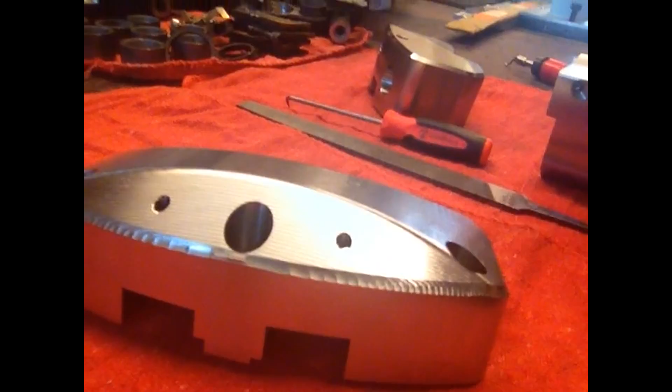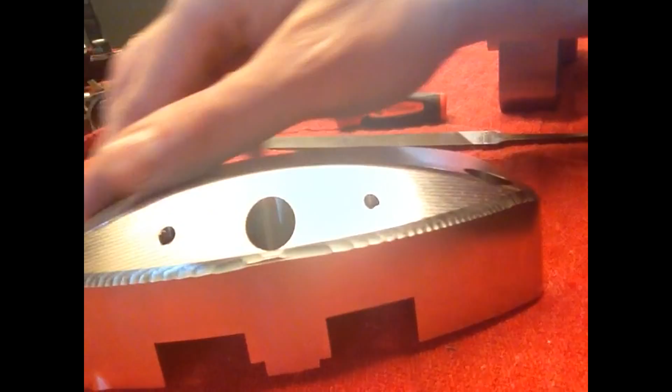And I'm here today. I'm still working on the stainless steel disc brake calipers. So I'm doing some more 3D contouring. This is the back caliper. So let's see if you can see the lines here. I did a parallel pass on this one again, and it's pretty rough, which I thought it would be, along the chamfer that I had on the back side.

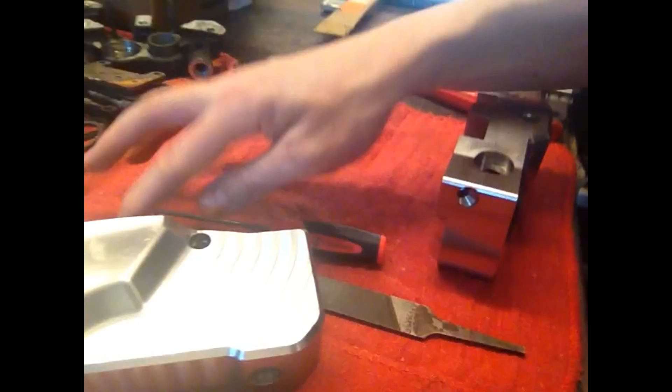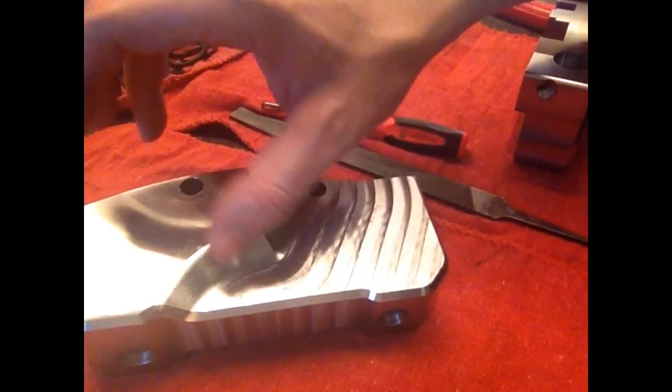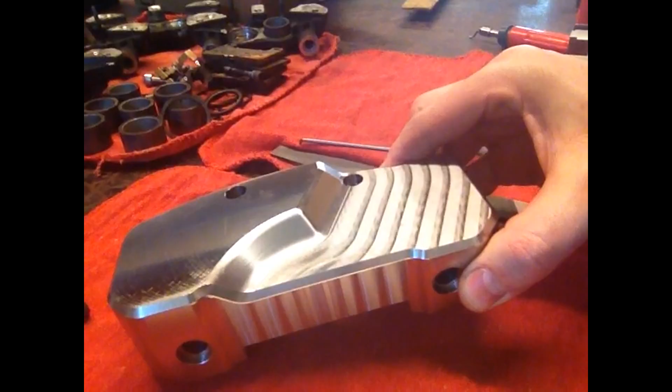So let's see if I can get the front one in here. This is the front half. When I did this, I did a contour, and I only machined basically the angled surfaces with the 3D toolpath. And it turned out pretty nice using contour. I did a 10 thou step over, pretty smooth. I don't know if that's going to show up. I need to get some better lighting.

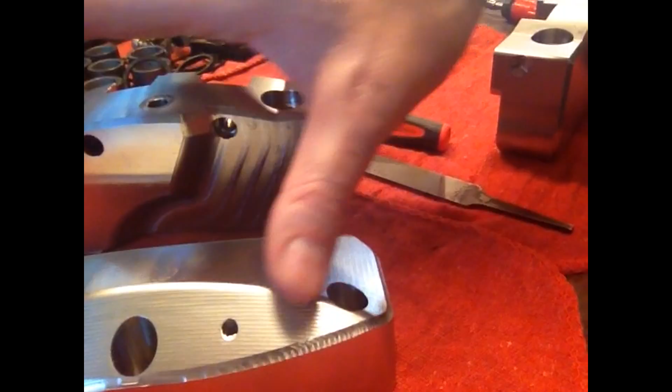So on the back side here, when I did the parallel, instead of doing climb one direction, I just had it alternate. When I did the tops here, I did parallel and I just went one direction. Came out pretty smooth. Alternating directions, it is kind of rough, but I'm just going to fix that. I'm going to go back over that with some sandpaper, smooth that out. But this I am going to try to remachine.

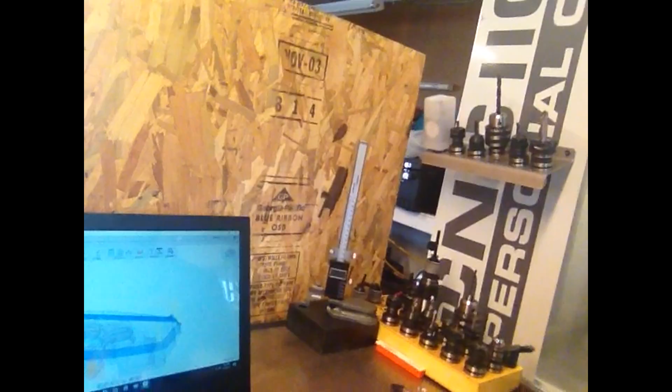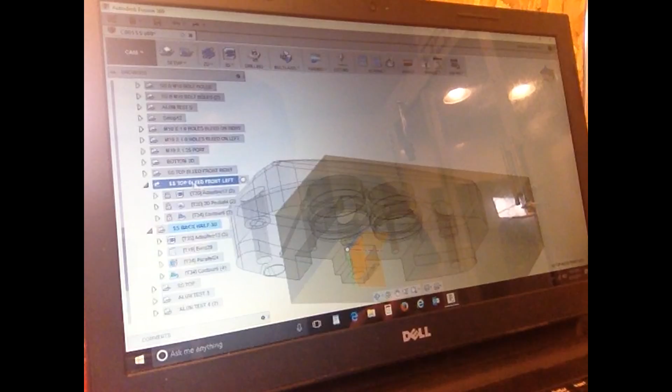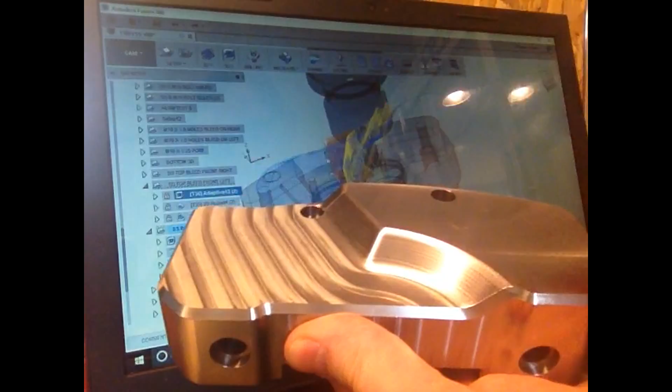So I will see if I can quickly show you what I'm going to try in Fusion. Hopefully you guys can see this. So on the front half, which I've got the part hidden, but you can still see the tool paths here, I did an adaptive to rough this away. Then I did a pocket to do the cleanup.

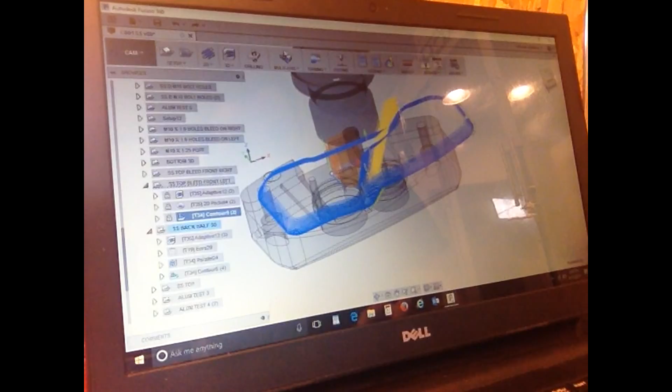And then to do the chamfers, I used a contour toolpath, and it just machined the angle, the chamfered surfaces. It's a pretty clean toolpath. You can see it here again. I don't know if you guys can see how smooth that is, but this came out really nice. So on the back half, I'm going to try the same thing on the contour.

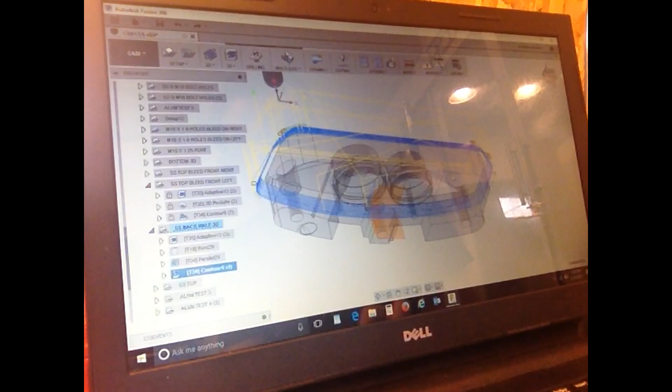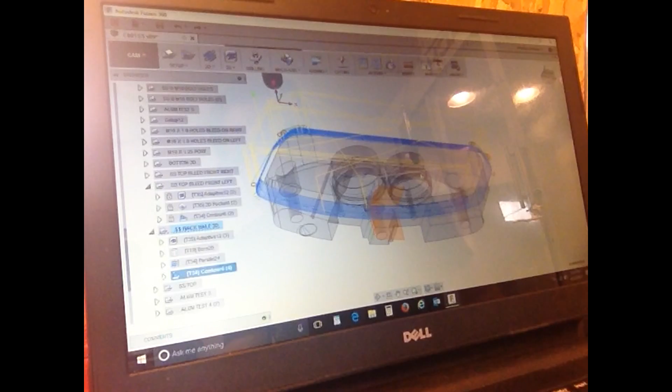Now, I do have a lot of rapid movements here, which I don't really like. I've been playing with it. I haven't been able to get rid of them. I am still pretty new to Fusion 360, so there's probably a way to do this. I just haven't figured it out yet. So I'm going to go ahead and run it the way it is. It's going to add a little bit of time to the machining, but I'm not that concerned about it. So I'm going to run this now on this side.

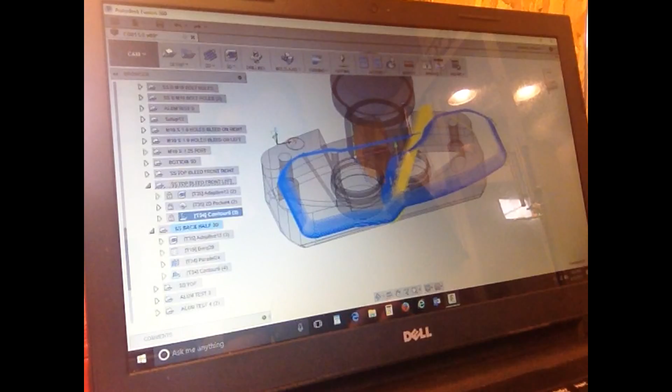I just selected the contour, ran it as is, and it did not machine the flat areas. I think I had flat area detection on. So that's how I got that toolpath nice and clean. I didn't have to mess with it that much. It's pretty much the first try, maybe the second try, I was able to get this. On this side, to just do this chamfer, I did have to mess with some of the settings. See if I can show those.

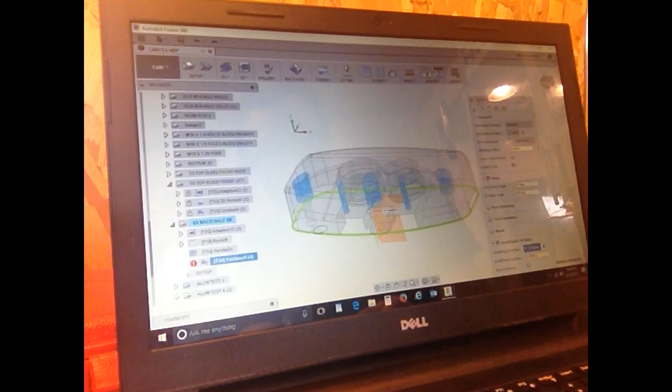I don't know if you'll be able to see them here, but basically I had to tell it a couple surfaces to avoid. Since it's a 3D, it kind of sees the whole part. It was seeing these counter bores, trying to go in. I don't want it to touch those, so I had to avoid those. But what I had to mess with, to just do the chamfer, I didn't want to do all this.

So flat area detection, which is what I used on the front side, doesn't really work because there's no flat surfaces on the back. So to get it to avoid the rest of these, I could have done avoid touch surfaces and selected all these. What I did is I did slope.

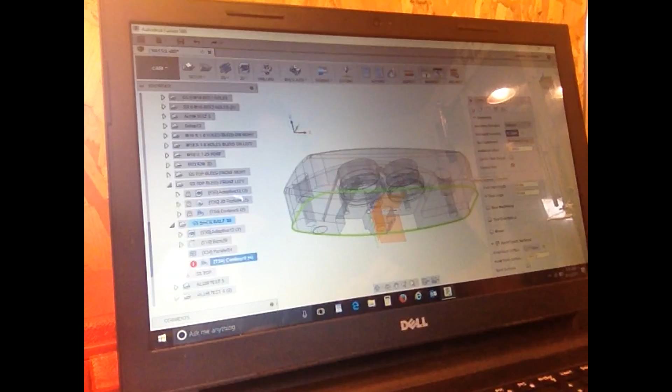So slope machining, you basically specify the angle that you're wanting machined. So I specified that, this is a 45-degree chamfer, I only wanted to machine anything that is 40 degrees up to 90 degrees. Wasn't sure if it was going to work, so I did it, and it did seem like it worked, did what I wanted it to.

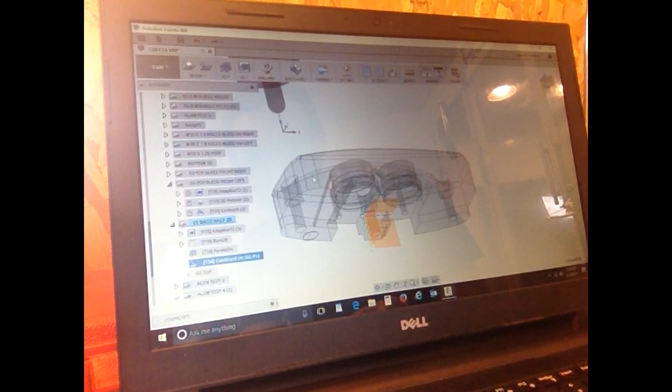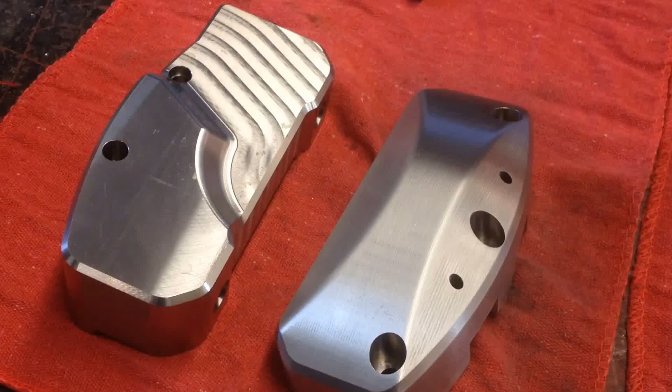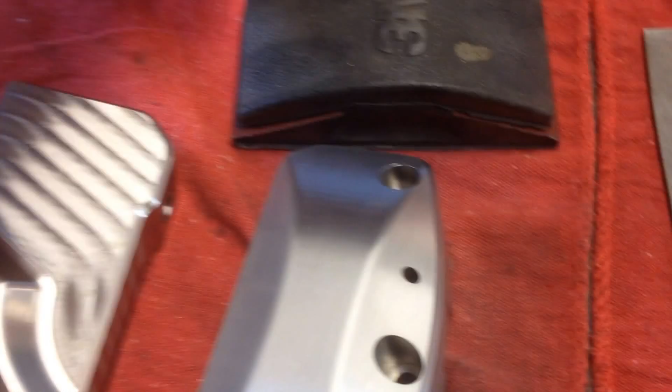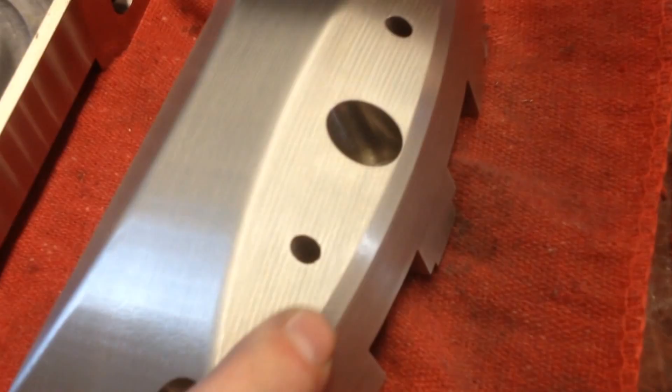Okay, so you can see these are the two halves. This is the one I just took out of the machine. I sanded on it a little. I just used my good 3M sanding block, and then went over it with some Scotch-Brite. So it smoothed it out. You can still see some lines in it. But the chamfer, which is what I went back and remachined, came out really nice.

And you can see this is a 10 thou step over. This is a 20 thou step over with a 1/2 inch ball mill. And there's really not much visible notice, especially after I went over it with sandpaper and Scotch-Brite. So I think I'm just going to leave this. Got the second one in there running.

I need to go back. There's a lot of deburring I need to do, some holes I need to tap. Some things I need to clean up on them. Still need to go in, get a small Dremel or something and try to clean out the bottom of all the little ports that I drilled. But other than that, they are pretty much done. So they're going to go together like so.

This is the outside of the bike. These are for a motorcycle. I don't know if I've ever mentioned that. So this is the outside. This is cut away for fender clearance. This is the back side. This is basically cut away clearance for the rim. This is so that you can get the caliper on the bike without having to take the whole front wheel off of it. So I don't know if I've ever shown these.

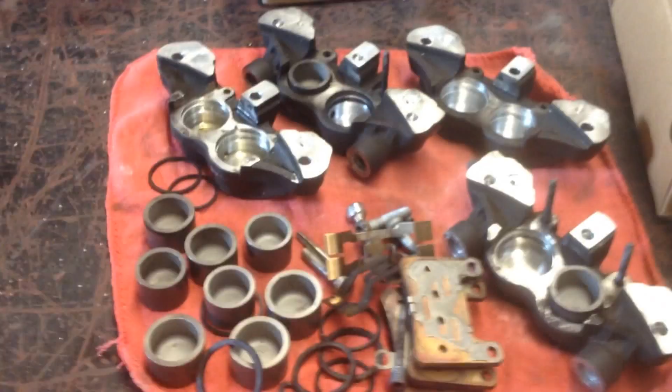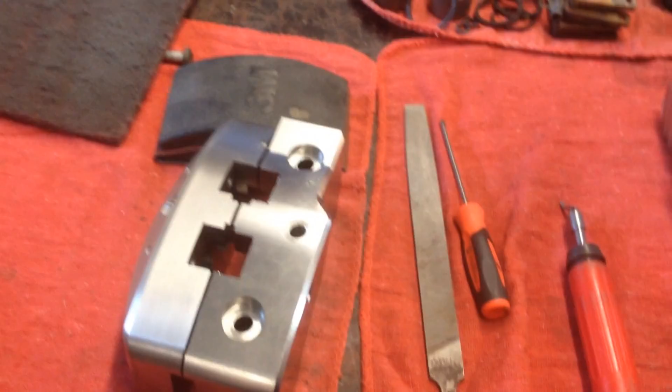This is the set that the guy gave me that I basically used to measure to come up with these. So what the guy was looking for was just a big, heavy set of calipers made out of stainless steel. So in the next video, hopefully I'm showing these done, and I'd like to at least take some pictures. I don't know if I'll be able to make a video of them on the motorcycle, so we can see what they look like, and maybe even get a video of the guy using them.